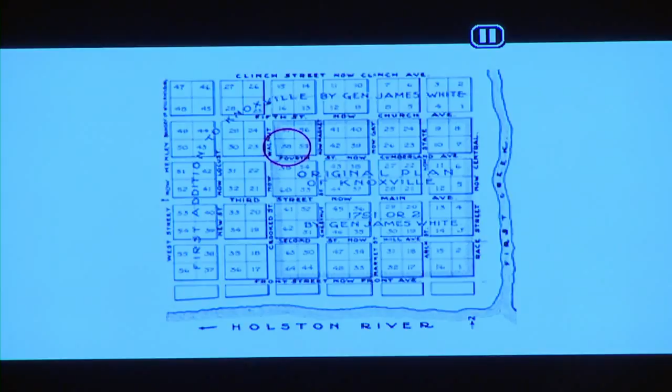McClung's descendants included McClungs and McGees, who were members of this church, who have long been influential Knoxvillians, and that shows you the link that we have in history with Knoxville, where it's intertwined. And I want us to appreciate that for our responsibility.

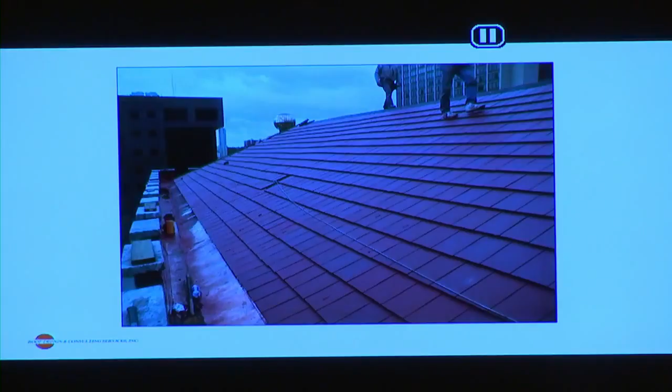So at one point in time, not too long ago, we re-roofed the building. You can see that in progress. I have a couple of photographs you might find interesting in some of this.

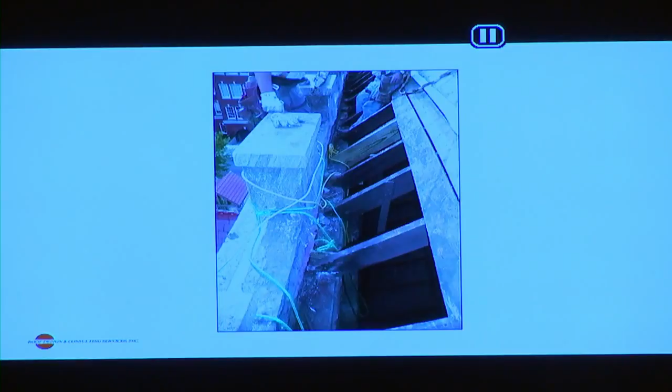When we re-roofed the crossing tower, we took the old tile off, the old roofing off, and we found that there was a lot of damaged wood that had to be replaced. So that shows you the conditions we began to encounter there, some of the rotted timbers.

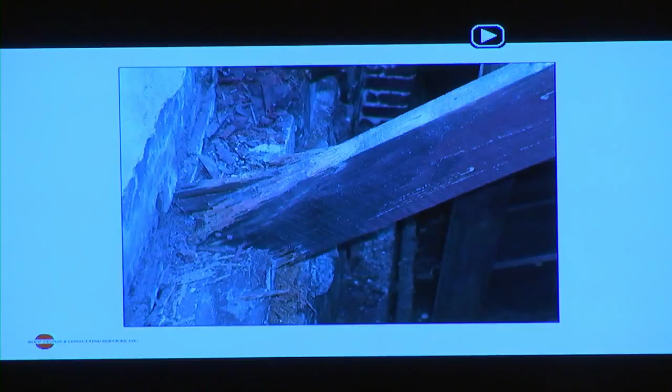Just interesting, if you can tell from this photograph, above the ceiling here in the crossing tower, there's about a 20-foot attic. So that's a view inside the attic of what's up there once we started removing the roof and removing the framing.

This is the attic that was above the new music suite. You can see that it also has some damage that we had to correct when we did the re-roofing part. So moving up to where we are right now, what we have been doing.

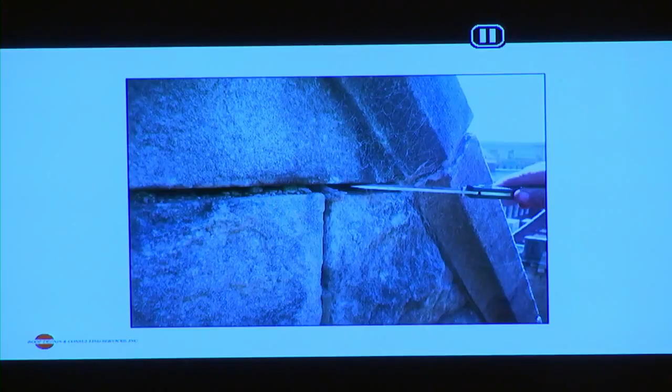I want to show you a few photographs. I don't want to be Chicken Little, okay? It's not going to fall down, but it's in bad need of repair. This will show you a few examples of some of the things that we found.

The masonry, the stonework, the brickwork was in extremely bad shape. So we had to find, one, how much of it was there, what was causing it, and what do we need to do to fix it.

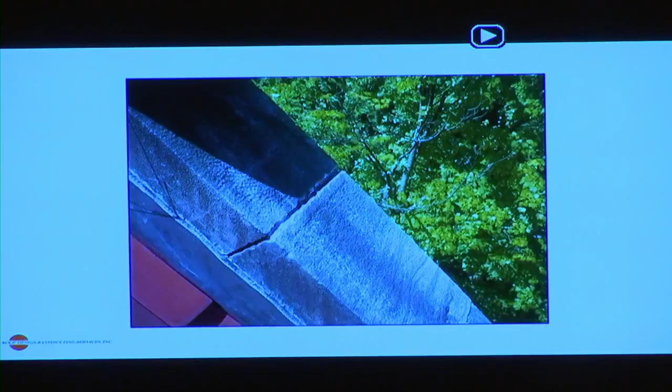Just another photograph of some of that damage. The earlier photographs that showed you the whole side of the building looked really good from a distance. But when you start getting closer, when you zoom in a little bit, then you'll see some of the defects that we found. This is one of those louvers at the top of the crossing tower here.

On the inside, everybody's seen the corner over here where the plaster has been removed. So we did an infrared scan to try to determine just how severe the moisture penetration was. The real dark purple color in this scan represents water, moisture that was trapped inside the walls.

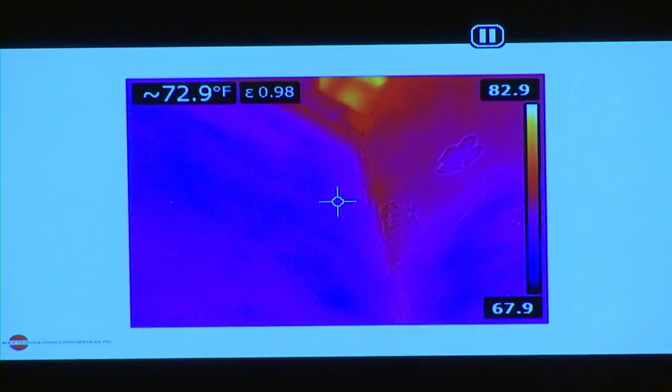These walls are solid masonry. They're not studs, they're called mass walls, because they're just a single mass, and they're anywhere from 12 to 24 inches thick. So if moisture gets in there, it takes a long time for it to get out. We have to really pay attention to how we let that happen.

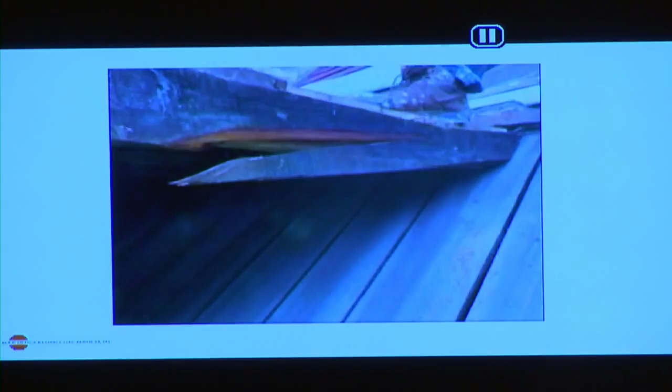Looking up at the edge of the roof, once we started taking some of the stones off, we found that the brick exposed on the wall is 12 to 16 inches thick with stone on the outside. We found the brick was badly deteriorated in some places, the result of age and all the moisture coming in.

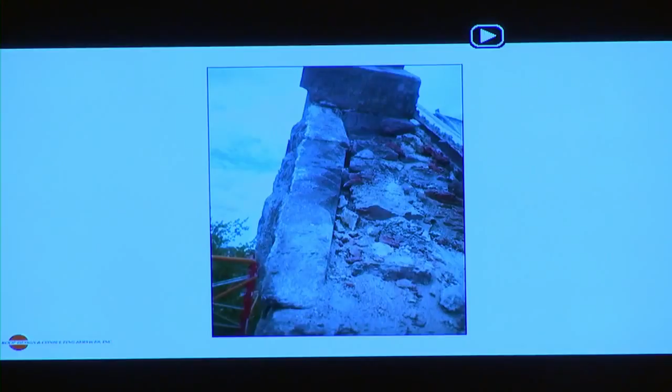We also found that from the fire in 1919, there were still a lot of bricks that had been fire damaged. These were so soft we could crumble them in our hands. It took no effort at all.

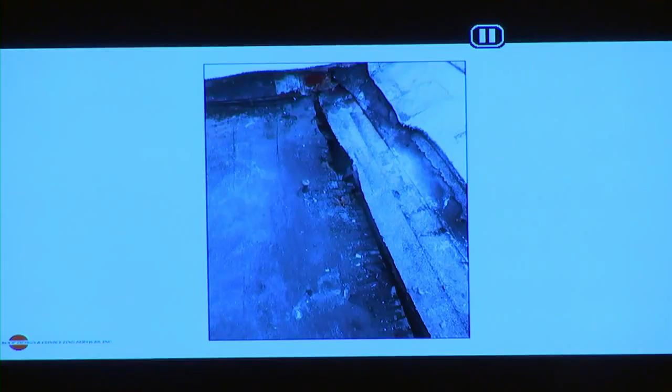This shows some of the wood roof boards that were still charred from that fire, a long time ago. That had to be replaced also.

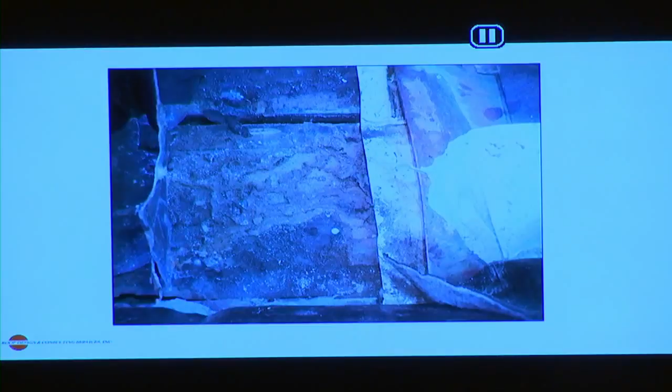We found termites, all sorts of water damage, as you might expect in East Tennessee. And the stone joints on the outside were probably one of the major sources of where the water was coming in.

There's over 25,000 linear feet of joints, about 5 miles worth, if you put them all end to end, on the outside of this building. So that's an issue—one, we had to look at them all, and two, we had to repair the ones that are damaged.

Other damaged stones—this is once again the crenellation stones around the top. Some of them are broken and we're going to be repairing those, along with other stucco damage and water damage around the outside.

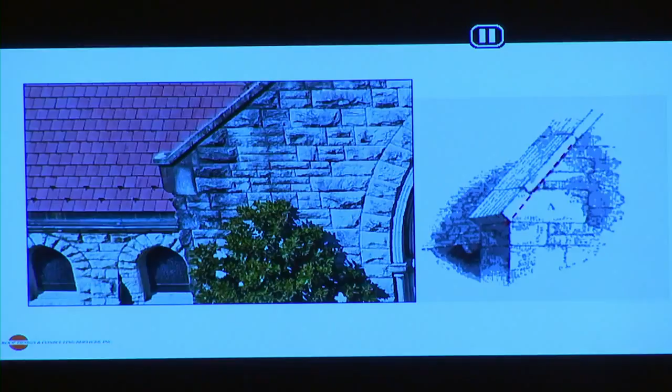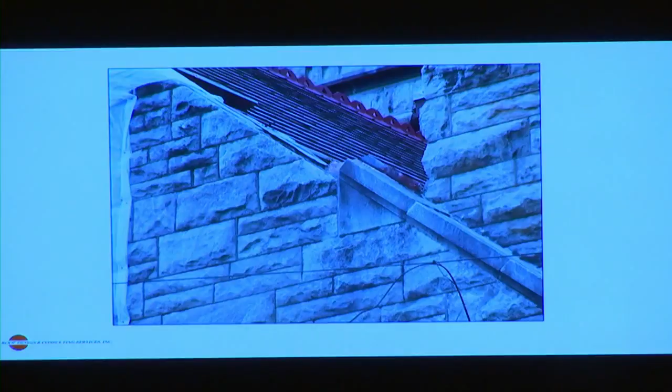So let me show you quickly some of the things we've been doing. We talked about the top of that wall where all the broken brick and stone was located. We decided the best result could be achieved by taking those stones off and replacing them.

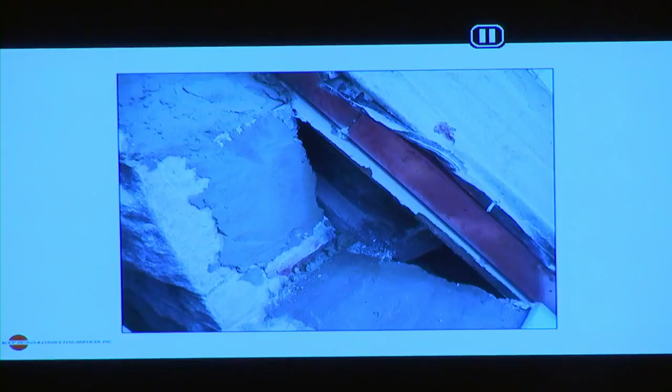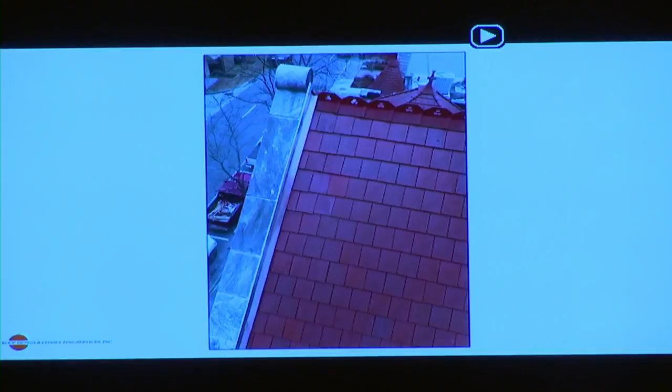We got new copper flashing that you can see here. Everywhere it was deteriorated, we put in new gutters and new fascia around the perimeter. And for the roof over the organ equipment, we tore it off completely, reframed it, and installed a new roof system to make it completely watertight.

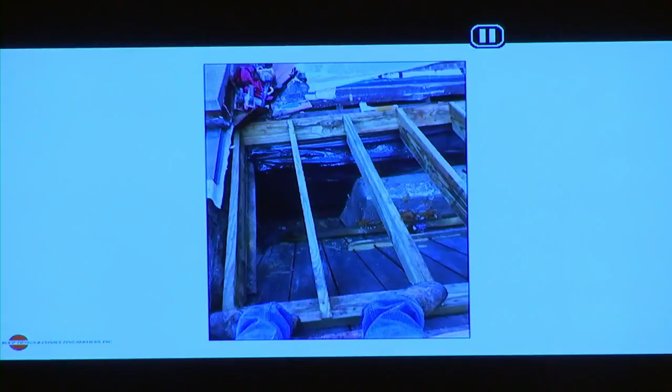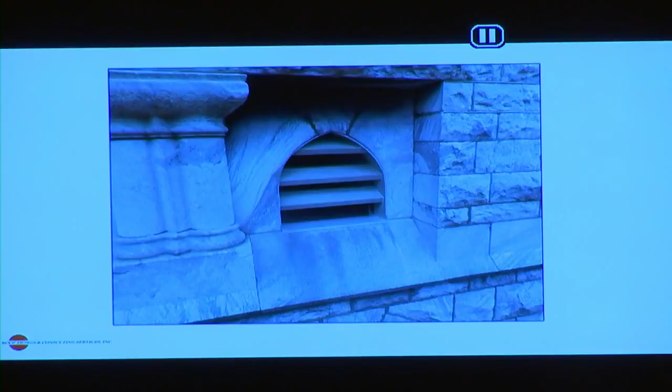Then we're addressing individual little problems. This is one of the new louvers installed around the top of the crossing tower. And this is a joint, or several joints, that have been repointed—we dig out all the old mortar and put in new mortar.

We found that past repairs had used improper materials. The old mortar was a particular lime-based composition, so we had it analyzed and recreated that same formula so it would match the performance and appearance. This shows a joint that had been repaired.

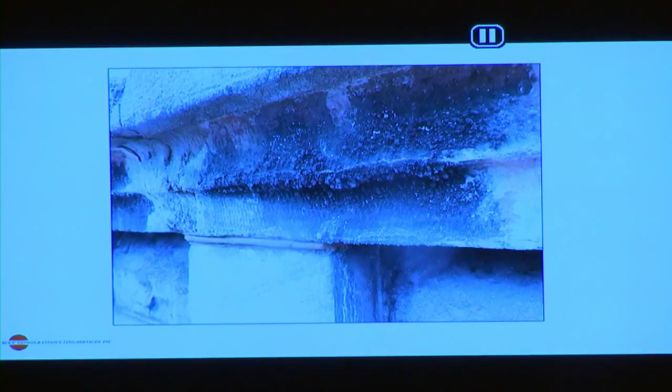Finally, we're going to be cleaning the building. In a downtown location there are years of soot and dirt up there, and you can also see things growing on the outside, so we have to take care of that. We're going to clean it, but that's done afterwards, after all the repairs have been made.

We're trying to finish all the water issues within the sanctuary so we can redo the plaster. All of that is leading up to reopening the sanctuary with our new organ later this year, this fall.

So that's kind of where we are. I think Yogi would be pleased that we do have a plan—we know where we're going, and we know where we have been. A couple of things I'd like to do here as we close.

I found a Bible verse, some scripture from 1 Timothy. It says, 'For if someone does not know how to manage his own household, how will he care for God's church?' It's God's church, it's our church, my church. I've been here almost 50 years, and it's my home, and it's your home. And that's what we need to remember, that we need to take care of that so it will continue to serve us.